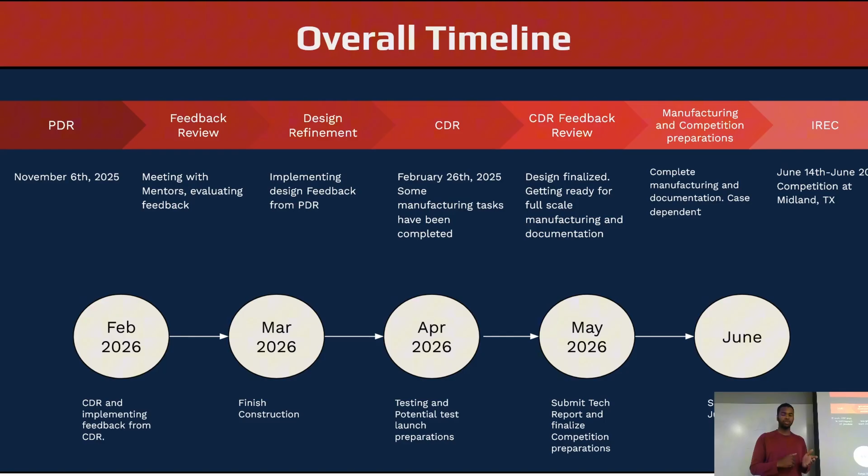So, changes from PDR and the current state of Juno. All of our airframe parts have been ordered and received, and our motor and its associated hardware have been ordered. We have begun cutting and squaring the airframes and couplers, and we are still evaluating potential experiments for the SDL payload challenge. We have set an internal team deadline for March 25th.

For our budget, the team has spent around $3,800 so far, and we anticipate needing to spend another $780 on the actual rocket. The remaining spending that we have is around $2,880, and almost all of that is competition costs. That's dominated primarily by the lodging expenses for 7 nights, 3 rooms for 8 people, and the $700 rocket fee.

We currently have $2,428 in the bank, and we anticipate needing another $840. That is our baseline budget. We do have an ideal budget or ideal case, and that includes an additional room that adds around $600 to our overall need, which brings it up to $1,435.

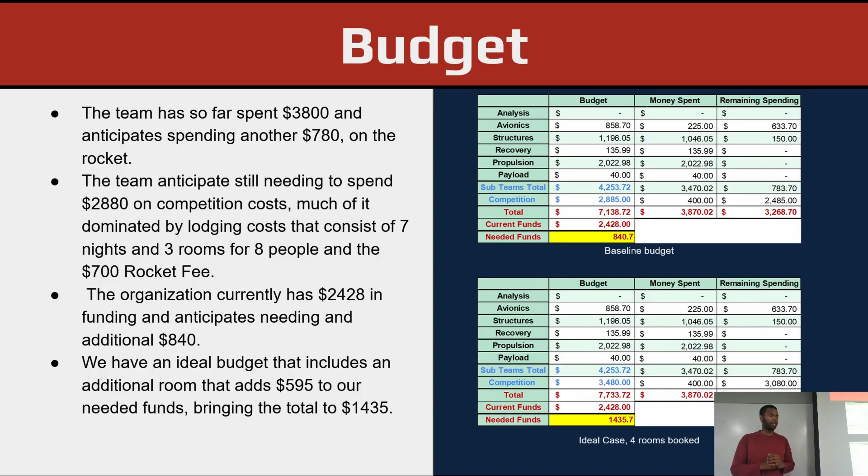Moving on to analysis. Starting with an overall overview of Juno, Juno is a 6-inch diameter rocket with a total length of 117 inches, which is a little under 10 feet. It has a dry mass of 39.2 pounds and a wet mass of 69.3 pounds, and that's including the motor and all associated hardware.

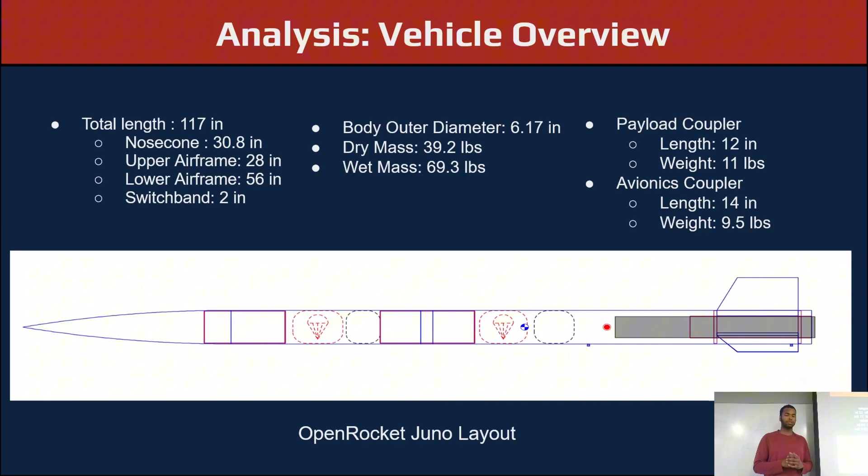We have 2 main internal coupler sections that carry a lot of the important items. The payload coupler, which is 12 inches long, contains the CubeSat for our payload experiment, and it weighs 11 pounds. The avionics coupler, which contains all our flight computers and associated hardware, is 14 inches long and weighs around 9.5 pounds. The 2 couplers are where we've decided to add our variable ballast to tune our stability and tune our apogee.

For a breakdown of the overall competition scores, there is a total of 1,000 possible points, along with an extra 50 bonus points for adopting the CubeSat form factor for the payload experiment. Of those 1,000 points, 60 are awarded for the timely submission of competition documents. 440 points are split between the technical report and the design and build quality, and the remaining 500 points are focused on flight performance.

Breaking down that 500 for the flight performance a little further, 150 of those points are awarded on a binary basis for recovering the vehicle. If the vehicle is successfully recovered with no damage or is reflyable, the team is awarded 150 points. If that is not the case, we receive a 0 for that 150 points.

The remaining 350 points are for apogee accuracy, and that requires a bit more analysis in its approach. As the formula shows in the top left corner, we lose around 0.1 points for every foot in apogee we deviate from our 10,000 foot target, and a 3,000 foot deviation will result in 0 points being awarded for that specific item.

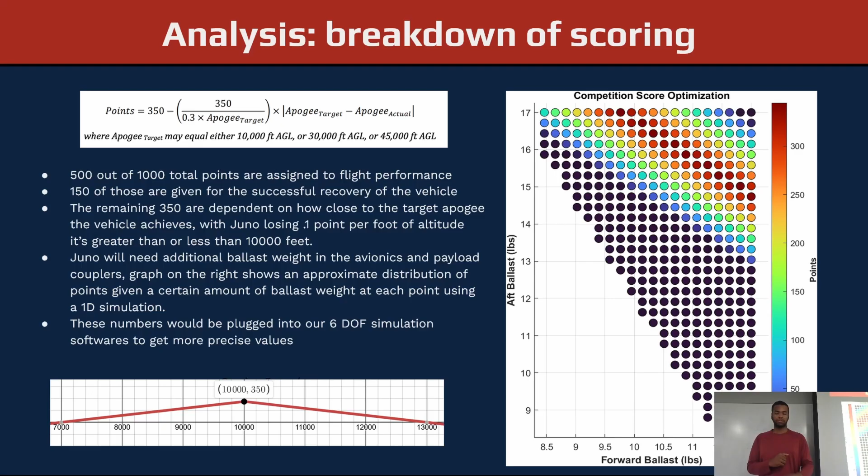Across all three softwares, we've kept our simulations with consistent baseline assumptions: a 6 degree launch angle, the same site elevation of 890 meters, and zero wind. This intentionally includes a roughly 2,000 foot buffer in our targeting to leave margin for real world effects on our potential apogee loss.

Our stability across all three softwares is around 2 calibers. Once we get closer to the launch, we will update these simulations with more up-to-date masses and weather expectations. That will help us further refine our simulations. Moving on to propulsion.

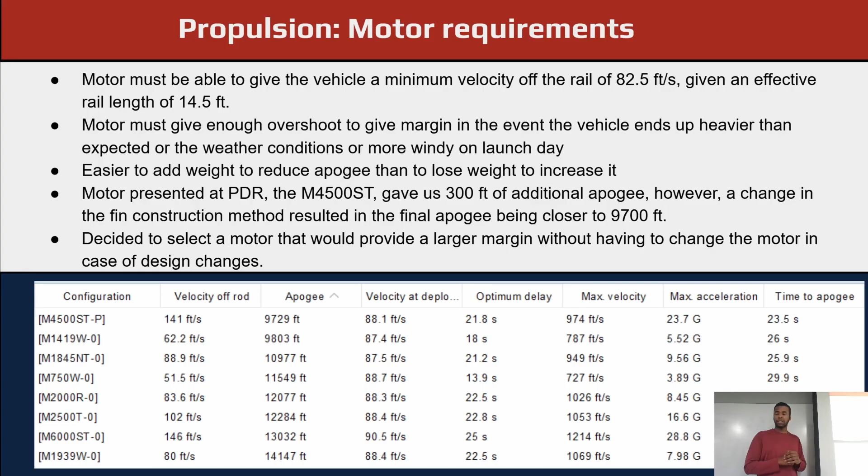So presented below, we have a table of around 8 motors within the M impulse class that fit our needs, and we have around 3 of them that meet our minimum off-the-rail velocity. The M4500 is the one we presented at PDR, as I previously mentioned. The other 2 are the M6000 and the M2500.

So we ended up going with the M2500 as it met our minimum off-the-rail velocity, and it gave us around 2,000 feet in overshoot on our apogee, and that would allow us to accommodate variability in the wind on launch day, as well as general design choices.

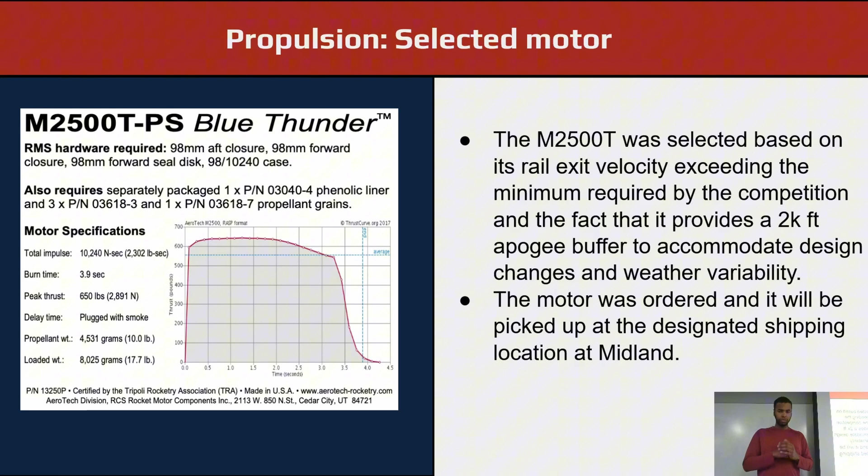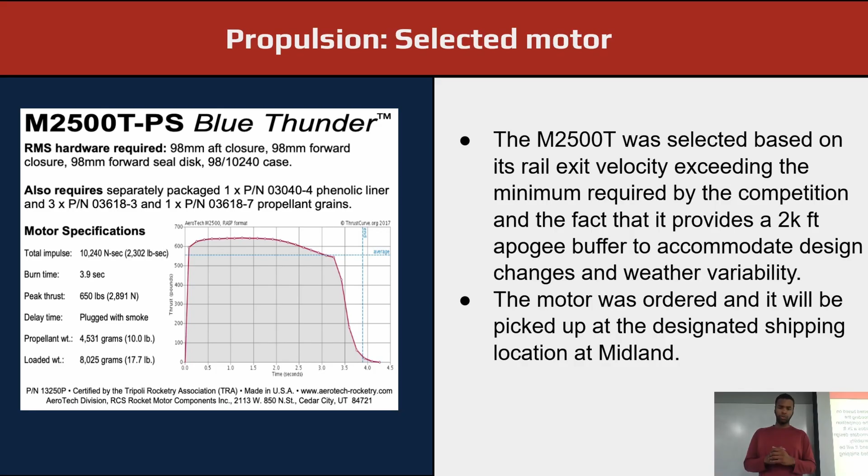For the M6000, the reason we decided against that one and chose the M2500: while they both met our minimum off-the-rail velocity, the M6000 gave us a lot more overshoot. It overshot by around 3,000 feet, so that would require a lot more mass added to the vehicle to get it down to 10,000 feet. So, yeah, the motor was ordered and it will be picked up at the designated shipping location at Midland at the competition. And we'll pass it off to structures.

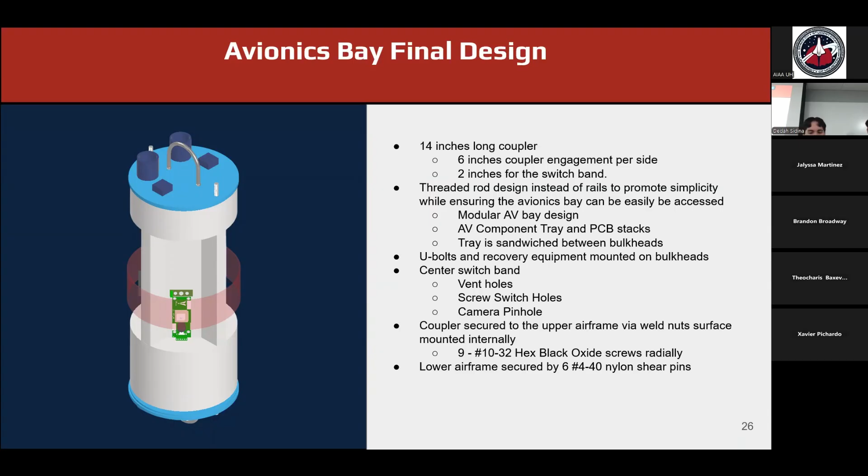Weld nuts along the coupler, and then we will have 9 10-32 hex bolt black oxide screws radially to secure the coupler to the upper airframe. Okay. Here you can see the arrangement of the components that I have on the CAD. Some things may change slightly as avionics make further decisions on how they're going to do wiring and things like that. But a lot of this is adjustable, as we can change where the holes are going to be, so we can do the threaded inserts and maneuver parts around.

But as you can see, we have our screw switches, we have our batteries. Then black on the left is the camera, the RunCam Thumb Cam 2, which will have a pinhole camera as well. Then you have the TeleMetrum and the EasyMini as well.

As far as the payload, we're still going for the CubeSat design. We have a 3D printed frame as well as a 3D printed sleeve, so it'll all go together. As far as the ballast weight, we are going for a ballast right now because we haven't had an experimental payload designed yet. The ballast will be pretty much squares with varied infill, so we can reach the desired weight that we want. If we need to add weight, we can add it for ballast without affecting the stability too much. So it's pretty simple. Again with the U-bolt and the threaded rod design.

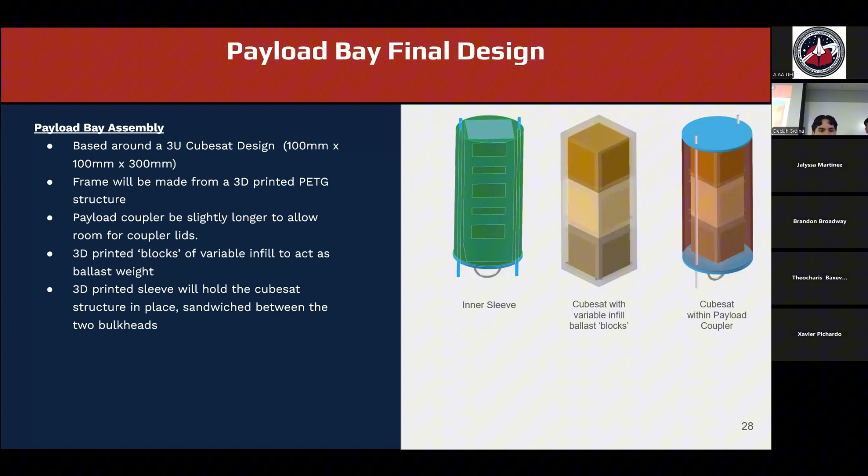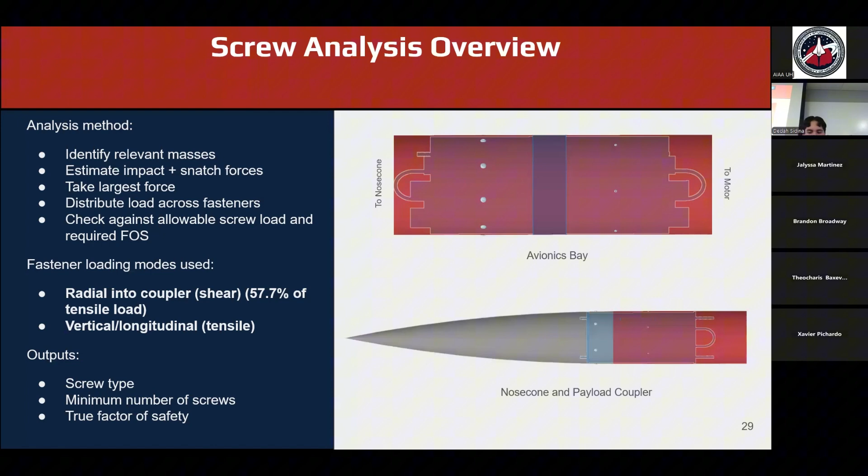As far as the screw analysis, you can see the avionics one right there. Total, it's going to be around 18 pounds. You see the largest force of impact. And we're aiming for a minimum factor of safety of 2. And with nine screws, we exceed it and get a true factor of safety of 2.2.

As far as the payload, it's a little bit less force, around 3,000 pounds of force. And it is also lighter, around 12 pounds. And with 6 screws, we achieve a true factor of safety of 2.21.

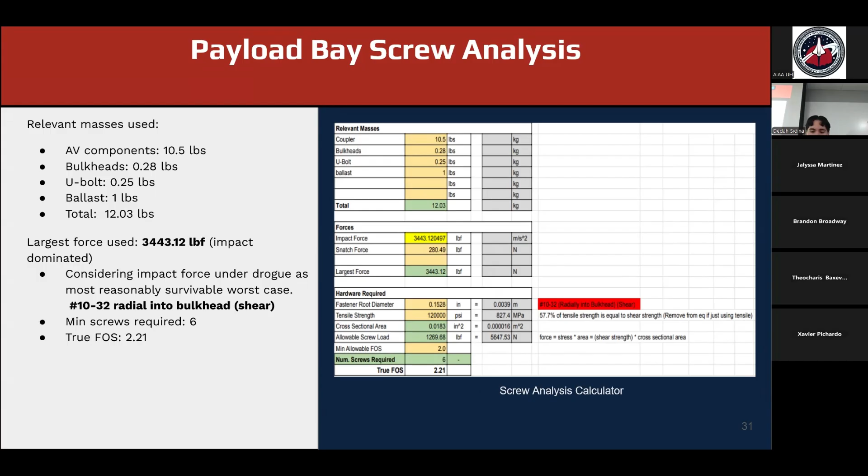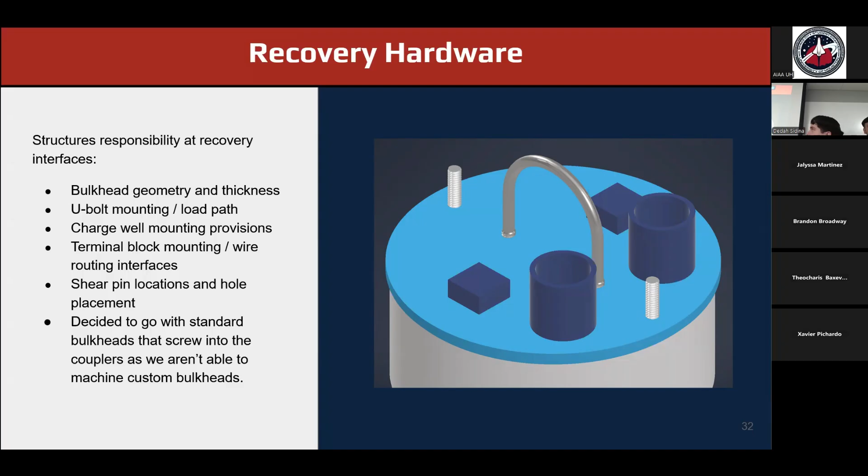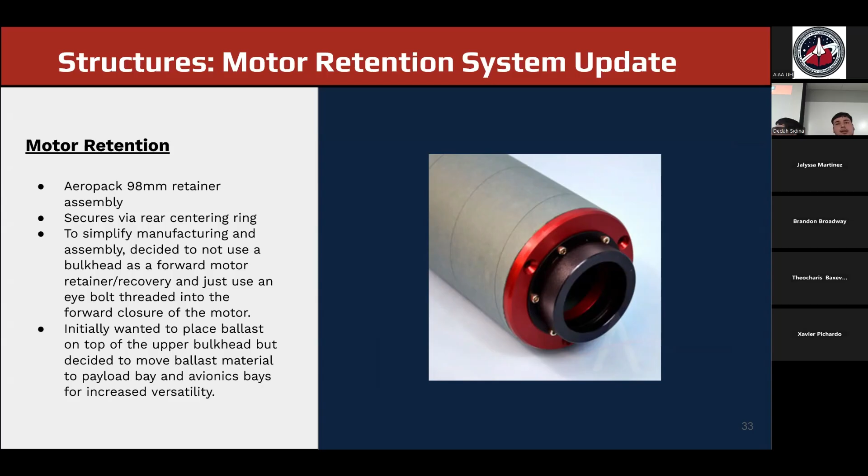In terms of our motor retention system, we'll be using a 98 millimeter AeroPack retainer. We'll secure this through the rear centering ring, to simplify our manufacturing and for ease. We decided not to go with the front motor retainer bulkhead and just use an eye bolt threaded into the front closure of the motor. We wanted to place ballast on top of this front bulkhead just because it's a somewhat convenient position, but we decided to move the ballast into the avionics and payload for greater versatility.

Our fins are going to be 3/16 inch thick with 5 plies of carbon fiber on each side, 10 plies in total. We will be going for a semi-quasi-isotropic layup with 0 degrees, positive 45 degrees, 90 degrees, minus 45 degrees, and 0 degrees to balance out the load properties and to prevent the prevalence of weak planes.

We'll be assembling this externally and then bond it to the motor mount tube. To sandwich the fins and make them more secure, we will be putting them between the forward and rear centering ring, and we will be doing this structural bonding with Proline 4500. Our core material for the fins, as we mentioned, is 3/16 inch G10 fiberglass.

Some of the laminating materials we have considered are intermediate modulus 6K carbon fiber from Composite Envisions, but we were only able to use it for our first coupon set, as we have unfortunately run out. In light of this, we are considering a new carbon fiber of similar modulus from Solid Composite that weighs roughly 11 ounces per square yard. And for comparison's sake, we also did some layups with 6-ounce fiberglass. For our epoxy system, we'll be using System 2000 from Fibre Glast with the 2120 hardener.

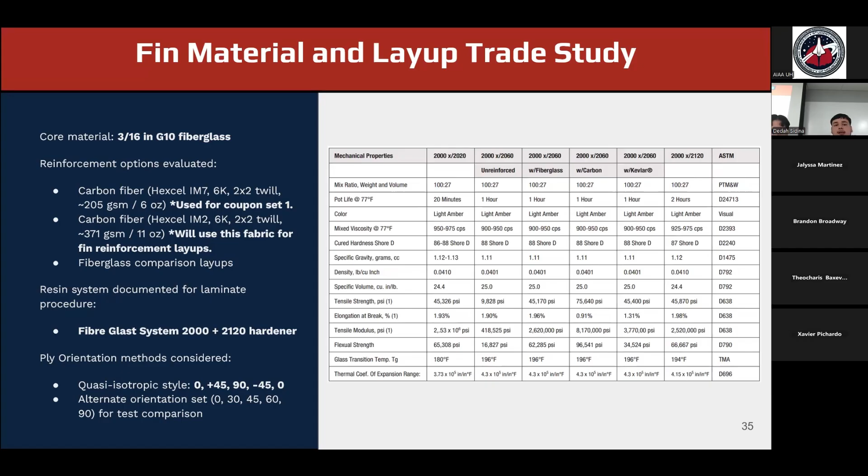And in terms of our layup procedure, we'll be taping and labeling the cloth in the order we're going to lay down the plies. Then we will sand the core and see how good the surface tension is for receiving epoxy through a water bead test. Once we see it's acceptable, we'll clean it off with acetone and isopropyl alcohol, then do our layups, apply our peel ply, breather and vacuum bag it, and for ideal curing of our long cure epoxy, we will keep it in a stable temperature.

Yeah. Doesn't even let me. Is it on here? You want to mess with it? We will see. Oh, let's go. How many engineers does it take?

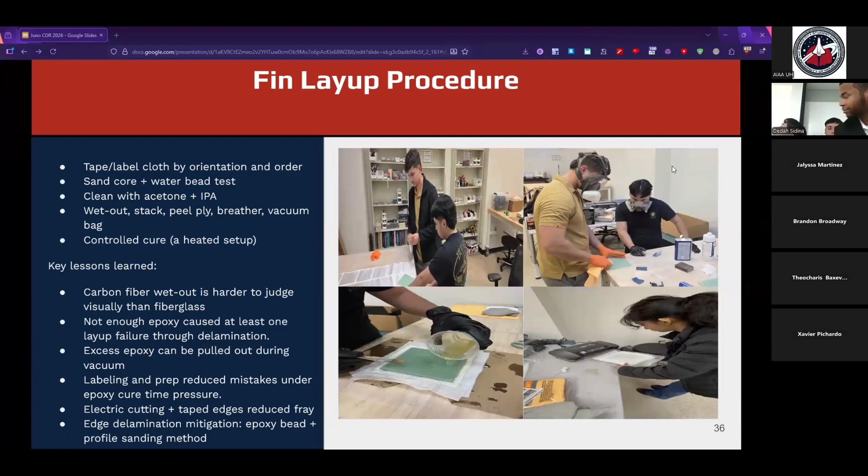Okay. While laminating the testing coupons, we have learned a few lessons. With carbon fiber it is visually harder to tell when it's fully laminated because it does not have the same transparency as fiberglass. In one of our coupon sets, there was a partial delamination failure when we tried cutting it out. So we definitely need to make sure our epoxy is applied evenly and there's no voids or bubbles.

Labeling and keeping them sorted definitely saved a lot of time in coupon manufacturing. We did it in only a few hours. And as we said, our taping and using electric shears also saved time and effort. Okay.

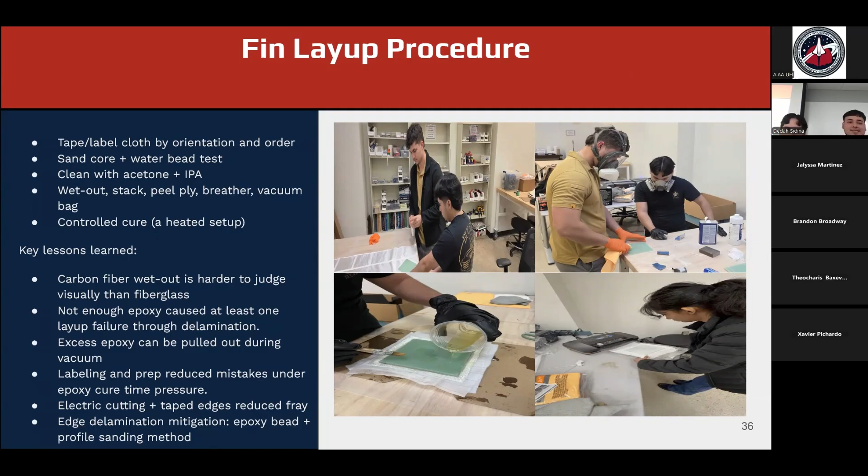I think you skipped 2 slides.

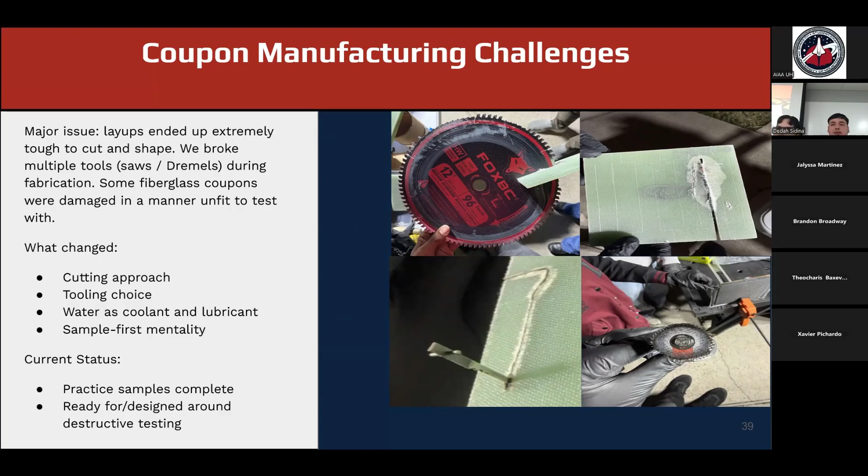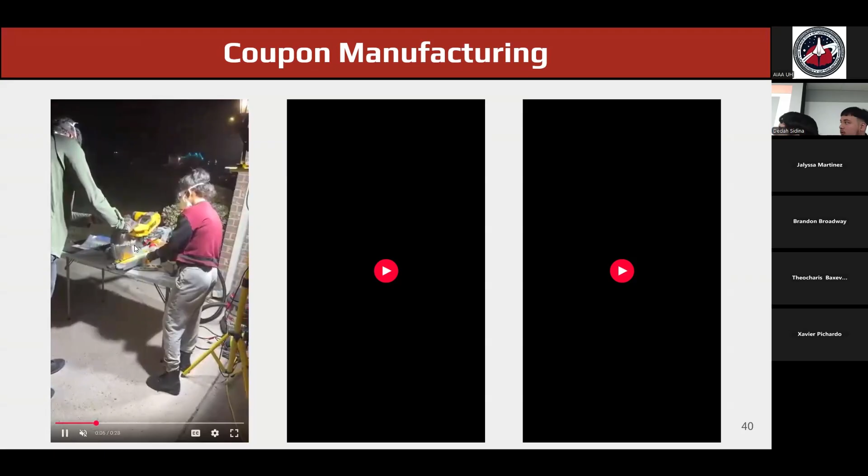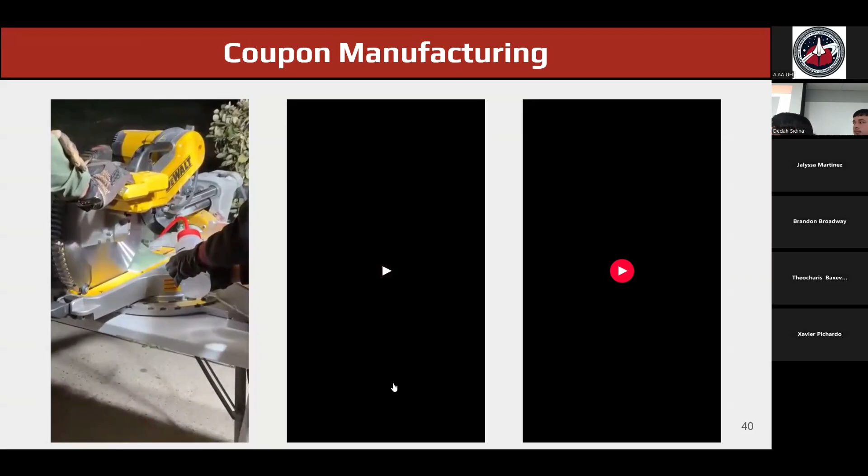Well, there's them cutting some of the coupons. This one over here. That's cleaning the blade, I guess. No, it's actually cutting with the water spray. Oh yeah, cutting with the water spray. And then more cutting. It was a lot of work. There you go.

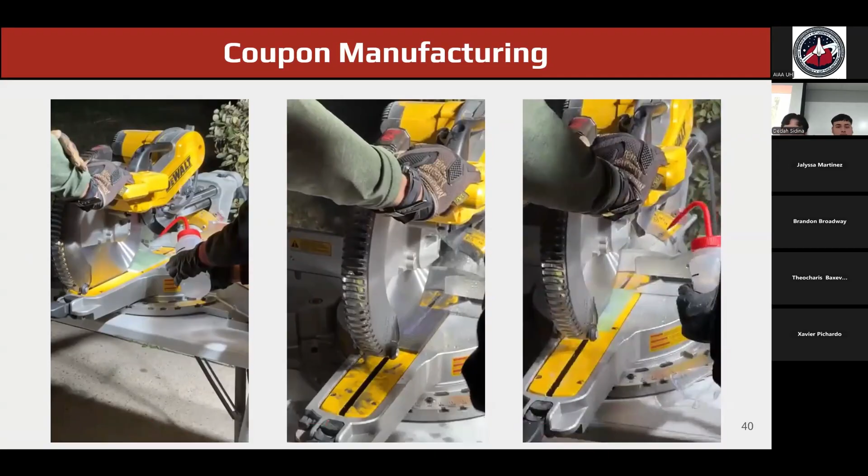As a direct test to determine our shear modulus, we'll be using test coupons made of the same base plate and the same layup style we plan to use for our competition fins. There are 3 additional sets of fiberglass coupons with varying layup styles. Of those 3 sets, one is made as a control to determine the approximate strength advantage of carbon fiber. In this, we will have the same layup orientation as the competition fins. To empirically determine the shear modulus, we'll be using 3-point bend testing.

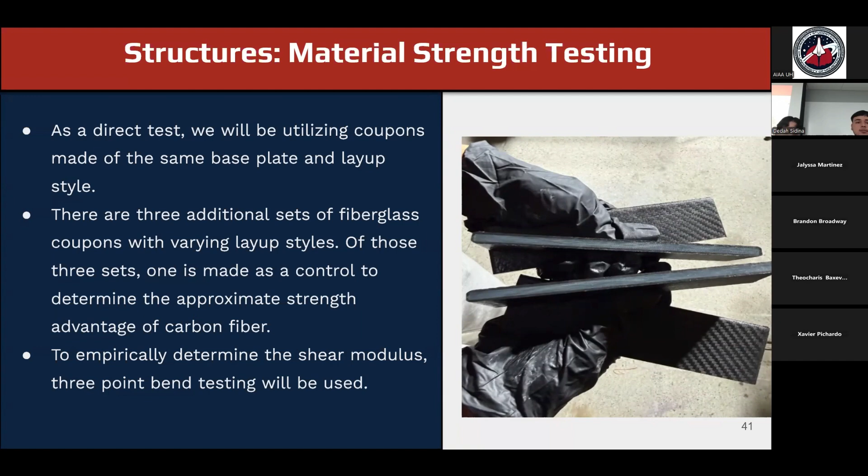Seeking materials testing, we have reached out to Dr. Hamami, who works with materials science and MAE. The main reason we are doing so is so we can support and facilitate our testing, validate our hand calculations, and find a good setup to complete the test. It's important to include this for our technical feedback and actually see that our assumptions and calculations translate to the real world.

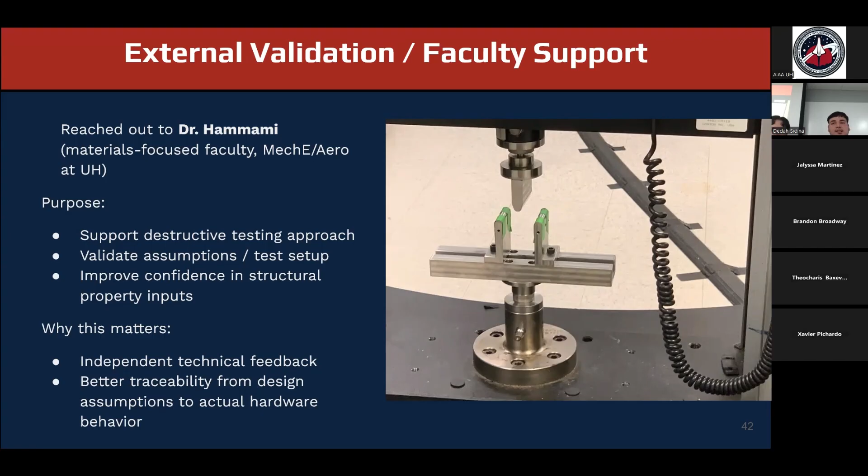So far, we have cut down our airframes from the original manufacturer size of 60 inches and 30 inches to 56 inches and 28 inches in length. The ends are squared, and we are preparing to extend the fin slots so we can slide the whole fin assembly in when it is complete, and prepare the centering rings for bonding.

The biggest thing when it comes to squaring airframes is that when you put on the coupler and push the airframes together, you will have little or no gap. And it's just better for general build quality, especially when you're putting sections together and trying to line up screws and things like that.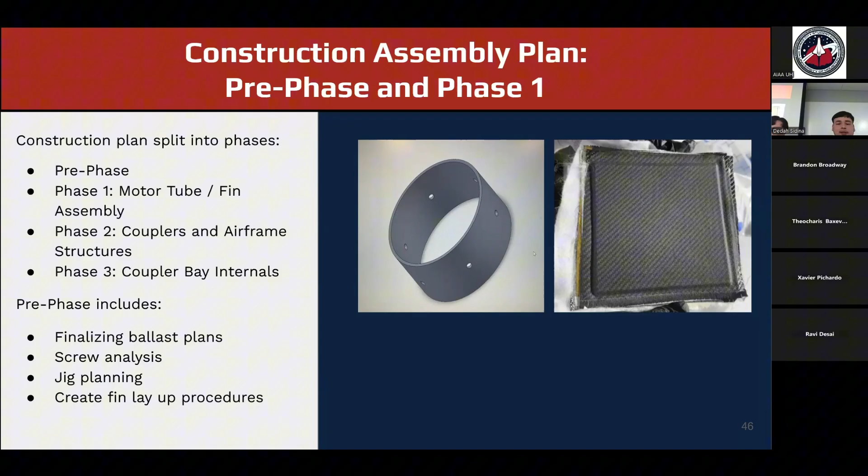For pre-phase and phase 1, our test coupons are created for strength testing, cutting down our airframes and squaring them, extending the fin slits, and preparing the motor mount tube for root bonding and subsequent bonding to the aero pack. Cutting out our fin profiles from the core plate and then doing our layups on them and cutting them down to their final shape if needed, mounting the fins to the motor mount tube and to its eventual place in the lower airframe.

For our final phase, phase 3, map out our radial holes from our center line jigs and drill our coupler mounting holes, shear pin holes, vent screw and camera pin holes, mounting our internal weld nuts to secure our couplers, drill our holes, mount rail buttons along the airframe. Lastly, prepare our airframe for painting and subsequent finishing.

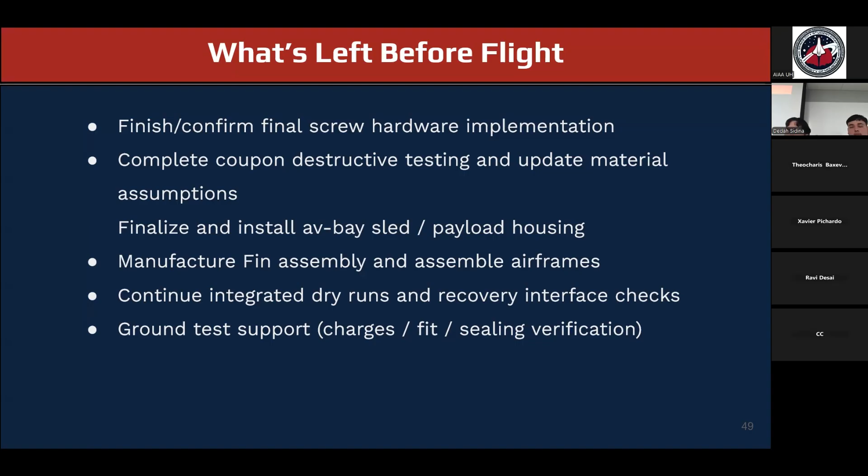Finalizing the install of the payload sled, payload housing, getting those 3D printed, and making sure we can do those final changes that we need. Manufacturing fin assembly and assemble airframes around that. Continue integrated dry runs, recovery interface checks, and then ground testing supports before we can actually assemble everything and get ready for flight. And moving on to avionics.

Thank you. So hello, my name is Jake Rodriguez. Sorry. Yeah, you good. Have you good? Oh, Nathan.

My name is Tan. I'm junior electrical engineering. Yeah. I am a sophomore computer engineer. I'm a junior. And we are the avionics sub team.

So just to give you a quick overview of what we do and what we are in charge of for the system is that we electronically detonate the charge and collect telemetry data from our 3 flight computers. The first one we use is referred to as COTS, commercial off the shelf. Those are our primary and secondary flight computers. Those are the ones who actually deploy the charges. We track them using 70 centimeters. I'll go more into that later. And then we receive the data from the ground.

And then our secondary system is our SRAD system, which is the student research and design system. For student research and design, we develop our own software and the PCB boards. For that system, all it does is just collect telemetry data. We also develop a ground station so we can see that live telemetry as it's crucial information to recover the rocket. And if anything goes wrong, we have that data so we can analyze if we need to.

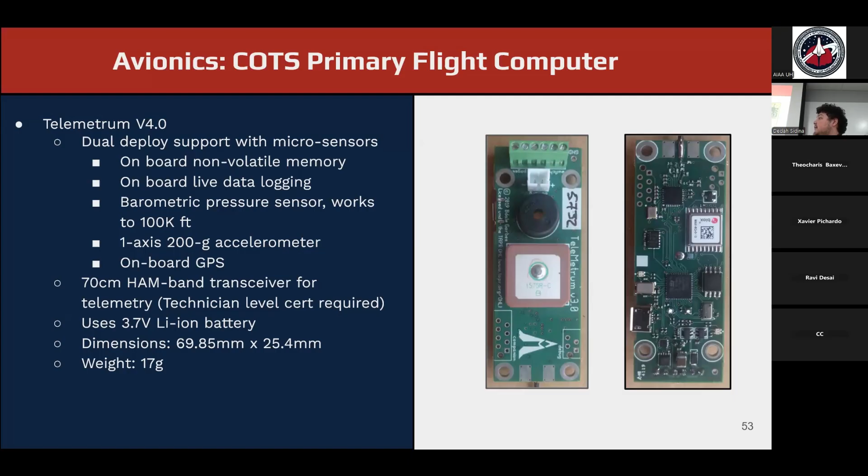It has a one-axis 200G accelerometer and an onboard GPS. It does use the 70 centimeter ham band, which is a requirement of our competition, and it is a technician level requirement for our ham license. It uses a 3.7V Li-ion battery, and the dimensions and weights are there.

Our secondary flight computer is an Easy Mini. It also has the same dual deployment capabilities and has non-volatile memory and live data logging, and has a barometric pressure sensor up to 100,000 feet, but it doesn't transmit data. It just saves it internally as a backup system. It also uses a 3.7V Li-ion, and this is just our backup system so if for whatever reason our main flight computer doesn't work, it will blow a second set of recovery charges to make sure that our parachutes will deploy.

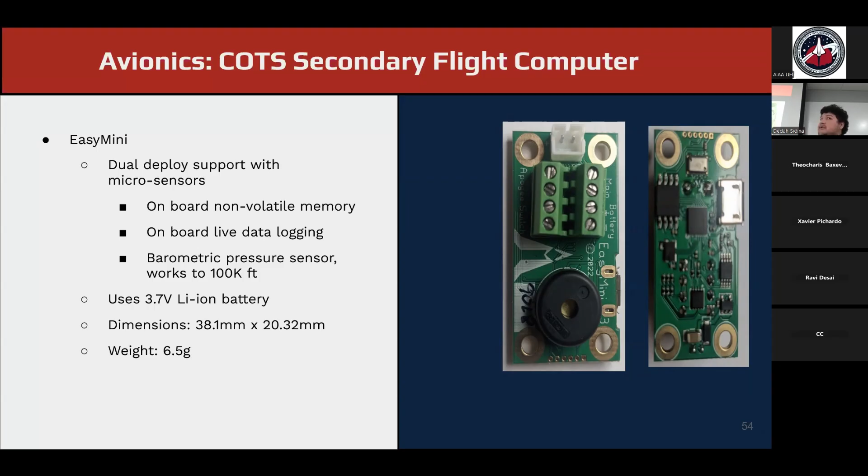Kind of go into the reasons of why we chose these flight computers. The TeleMetrum, like I mentioned, meets the 70 centimeter band requirement for the COTS GPS. That's a new rule. They found a lot of interference with the 33 centimeter, so we are required to switch to a 70 centimeter. We've already had experience with this flight computer before, so we chose to keep with it, and it has shown good results so far. And also just combining the altimeter and GPS in one unit is a great thing for ease of integration.

Easy Mini is just because it's a basic and simple barometric flight computer that fits our needs as a fully redundant flight computer. I will mention testing on this one later, but Easy Mini is a staple for beginning rocketry, and a lot of people use it. So it's very trustworthy and has been proven to work very well. And it uses the same software interface as our primary flight computer. Both use AltOS as the ground station and setup.

So going to the tertiary system, which is our SRAD flight computer. It uses a dual core microcontroller. It has all sensors running on I2C or SPI. We developed a new PCB from the ground up, just because we lost a lot of the PCBs from the year before, and we wanted to switch over to a different microcontroller. So we designed our own PCB from the ground up.

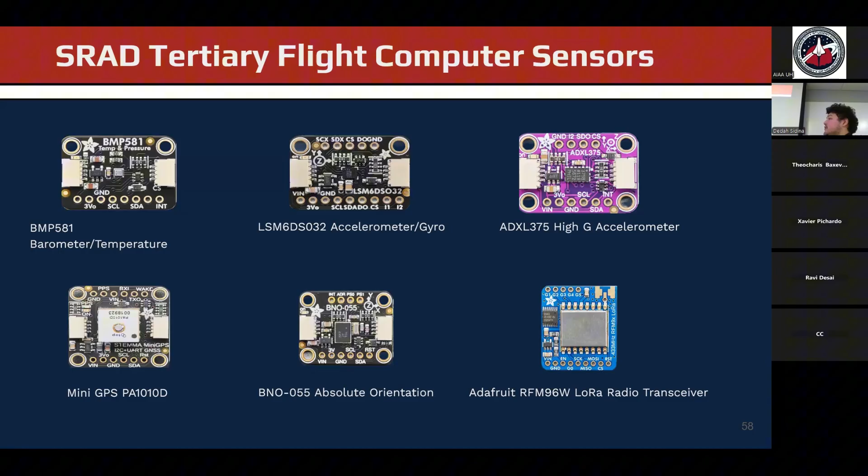A BNO, our absolute orientation sensor, has 9 degrees of freedom. We can talk about that one later. But it just tells us what the orientation of the flight computer and the rocket is going to be. And then this is our LoRa module, the one that transmits 70 centimeters out to the ground.

So the hardware deliverables from PDR are we were going to improve the PCB to include power delivery, SD card, and an RTC, battery drain test system, and then work towards a final prototype to get ready for a test launch. And what we have done so far is that we have finished a second prototype that adds SD card, power delivery, and RTC into it. The asterisk is that we have it and we have the plans for it, but we ran into some software issues that we're trying to make sure we can fix. But the board is aligned, and I'm talking to my software developer to make sure everything's finalized. The board isn't ordered yet, but we have the plans there.

Upgraded the system to 5 volts, like I mentioned. This goes back to the SD card and power delivery issue that we ran into where we needed more power. So we went to a 2S Li-ion battery that bucked down to 5 volts. We finished basic battery testing for the COTS flight computer, and we are on track to finishing the prototype by test launch.

Future tests: refining the SRAD flight computer for the final design, verify the telemetry setup, make sure everything works within the AV bay that we have, we can receive data and everything's great, and test flight the SRAD flight computer during the test launch in April. And so now we'll go into software.

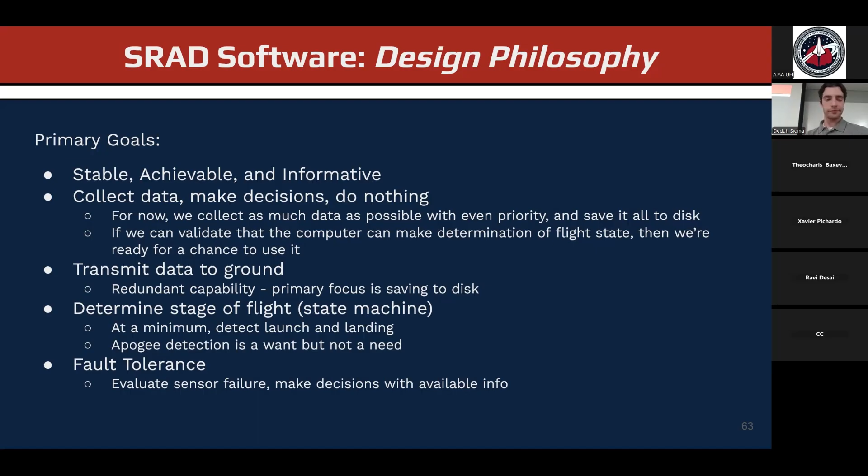So aside number one, why FreeRTOS? Why not just the plain ESP-IDF, or if you're familiar with Arduino boards, their own development environment that's convenient and easy to use? Well, first, what is an RTOS? An RTOS is a real-time operating system, designed for time-constrained tasks with hard deadlines. A hard deadline means that if you miss it, something fails completely.

There's no recovery. Windows or Mac OS is a general purpose operating system, and every time you run a program, there's no deterministic guarantee of how long it'll take. But those kinds of systems don't work in things like cars or rockets, because you press the brake pedal and the car has to stop in the same amount of time every time. So using an RTOS allows us to make deterministic claims and goals about what our software does.

So why FreeRTOS instead of commercial options? Well, FreeRTOS is free. It's open source. We can put it anywhere, use it in anything. And it's very lightweight. It is just a scheduler. It just allows us to make those deterministic guarantees. And it doesn't make any assumptions about the hardware. So we take care of that with the vendor package versus baking that into the RTOS.

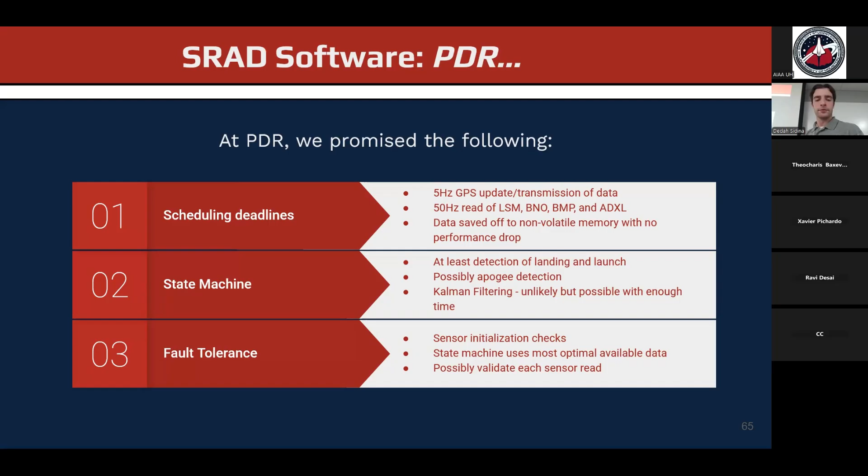So fast forward to now, we have hit this 5 hertz scheduling deadline. We have hit this 50 hertz scheduling deadline. The data is saved off to non-volatile memory with no performance drop. As far as the state machine goes, we can detect landing and launch. We can detect apogee, at least with software and kind of tests, but hopefully we will be able to demonstrate that with a true test flight.

We've also gotten deeper into sensor calibration, which turned out to be a bigger rabbit hole than we imagined it would be at PDR. And it's unlikely that we would have time to implement something like a Kalman filter before test launch, right? As far as fault tolerance goes, we are doing the sensor initialization checks. The state machine will use the most optimal available data. We're probably not going to validate every sensor read.

The likelihood of a custom PCB failing on launch, if it hadn't failed earlier, is extremely low. It was a high data overhead for us, and we didn't really have the transmission bandwidth. So at that point, if something breaks on the PCB while the rocket is in the air, we've already had bigger mechanical and structural problems.

So aside number 2 is the software scheduling. Aside from testing the code, how do we know that the system actually works, right? So aside from identifying which things take the longest, the 5 hertz transmission actually revolves around the 5 hertz GPS update. There's actually math here that shows us this will work, right? So the kind of schedule that we've picked is rate monotonic scheduling. Every task will run at some period and then take some amount of time.

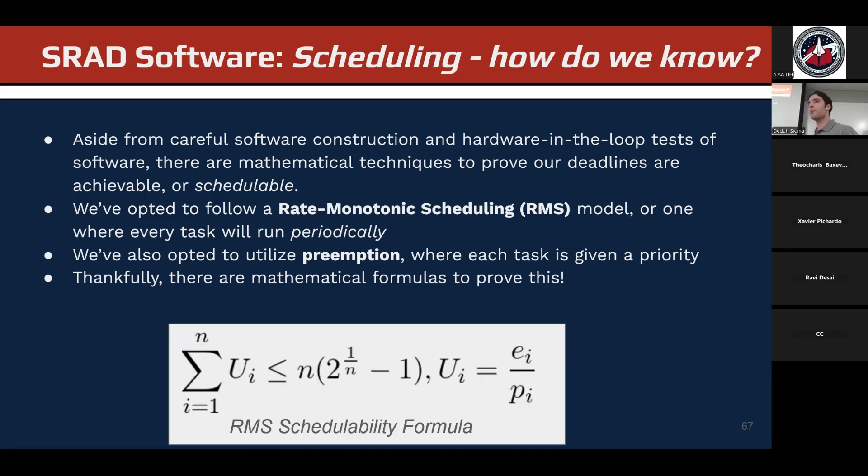You can tweak some rules and break some rules. It's just a math model. It doesn't really account for hardware as much, and you can actually kind of break that rule and go higher. But if you're under this bound, your system is schedulable. So here's what the test shows. We use the hardware CPU timers to benchmark operations in microseconds where possible, and milliseconds where not possible.

And we've got our tasks split up between cores, right? So FreeRTOS was a software optimization. Dual core also allows us some kind of asynchronous optimization. And at the end of this, when you sum this all up, the first core is only 16% utilized. Only 16% of the available processor time is utilized. The second core is only 7% utilized, right?

So we've got the software as lean and mean as possible in the computer and structured in such a way that there's tons of leftover processing power for more projects, or saying, well, we said 50 hertz, maybe we could pull off 100 hertz, right?

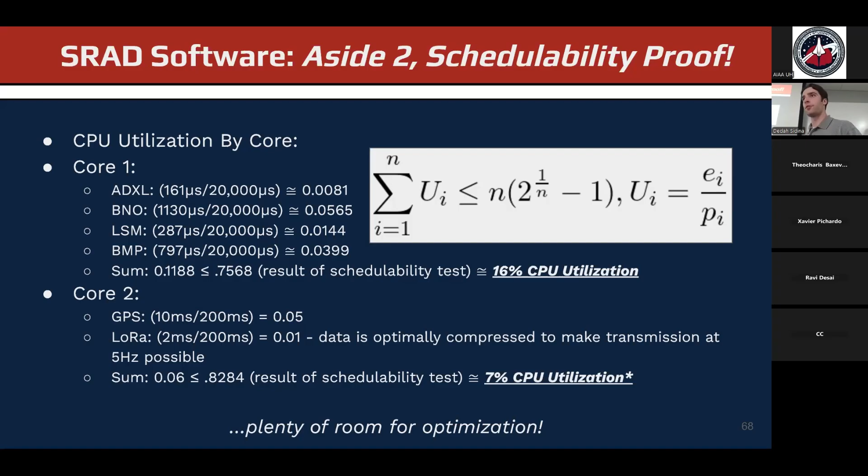So now we're moving into state machine and calibration. Basically, the sensors have to be reasonably well calibrated to make the state machine mean anything. If there's no expectation that the sensor data is correct at all, then the state machine is useless. So we really prioritized IMU calibration and altimeter calibration here.

So for IMUs, we want to calibrate the static bias noise when we power on the computer using an online algorithm. Basically, an online algorithm, like imagine you're taking the average of 20 numbers, and now you want to take the average of 21 numbers. Do you want to have to add them all up again and then divide by 21 instead of 20? Not really, right? And then you have to save all your old numbers. So an online algorithm updates that in place sequentially. All you need is your previous state and your next measurement.

This allows us to tweak and tune our calibration length and duration. We've selected Welford's online algorithm for this because it calculates running average and variance simultaneously, right? So let's say we power on the computer, then we move the rocket around on the stand. The variance will balloon pretty quickly. The calibration procedure will recognize that and just restart, because after we're done screwing with it, it's going to sit on the launch pad for probably a couple hours. That's beautiful calibration data time.

As far as the altimeter goes, for some time after startup, we're also going to use Welford's algorithm to average current altitude. We're going to save that value off as static bias and subtract it from future readings. The altimeter attempts to read in feet above sea level, but we don't really care about sea level. We care about how high off our ground we went, so we zero that out on launch.

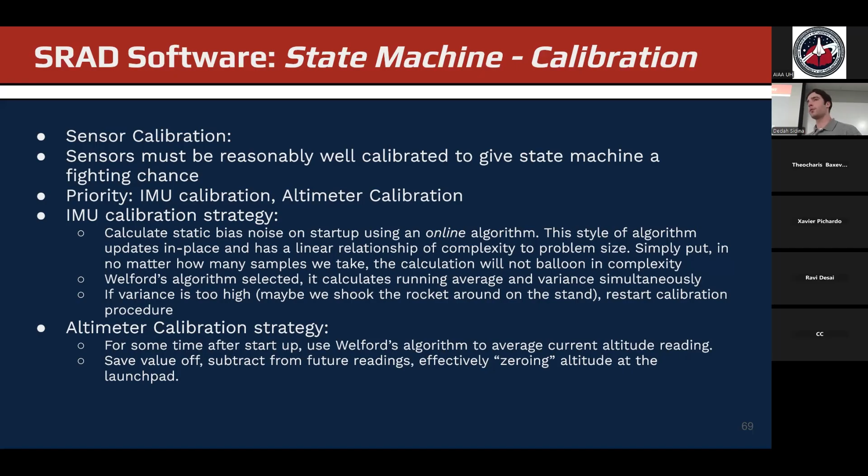So the state machine that we promised can detect launch. The algorithm somewhat follows this. We check for an acceleration above a tunable threshold for some amount of time. It's a pretty coarse threshold. Obviously, we go from almost zero acceleration to about 16 Gs in half a second or less. It's pretty hard to miss that one. So how high that threshold is and how many readings we need are tunable parameters.

Landing detection works similarly. We check for consistent, very low altitude. That one's also pretty hard to miss, right? So again, how low your altitude is and how long that has to be true is also a tunable parameter updated in place.

And then apogee detection: if change in altitude is negative enough, and how negative is a tunable parameter, between some number of readings, then we've detected apogee. This one's a little trickier. It's more nuanced to detect. So this is the all eyes on apogee detection for the test flight. The number of measurements and the descent comparator, how big that interval is, are the tunable parameters of that algorithm that we'll need to test.

And then fault tolerance. Like I mentioned earlier, we don't have two of every sensor, but we have two ways to get every source of information that's spread across the sensors. We can compare sensors. That's useful for future designs. What did we like? What didn't we like? How hard was it to get this one to work?

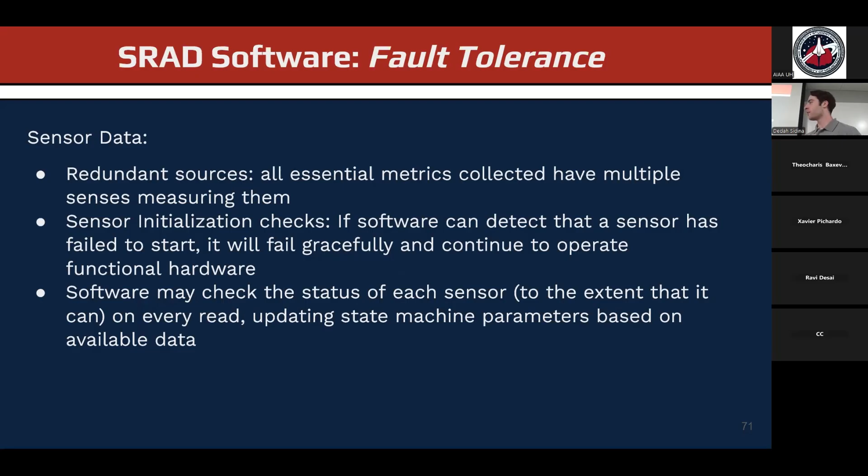And then open work following CDR. The goal of this list is things that, let's say our dreams come true and we get all this done, anything that needs to be tied up is validated and done right at test launch.

Some other open things that could not hurt the design we already have are sensor fusion algorithms. If we have two sources of information, you can denoise them or calibrate them, but you can also denoise them against each other. That would streamline our sources of information and make our data more accurate. If we can compress more data, we can send more data. Right now, we're sending at 5 hertz with some assumptions about what the least significant bit is on our data.

If we could send more, we would, right? So because of the antenna hardware that we've chosen, we have a really reliable and strong and wide signal. But that comes at the cost of not being able to transmit as much. So if we can make our data smaller, we can transmit more.

Flash memory file system instead of using an SD card. The SD card modules have proved finicky and it's slow and also can damage the SD card with writing at the amount that we're writing. I mean, we probably write like 16 kilobits of data every half second or so for the entire time the computer is on. And so aggressive writes to the SD card can wear it down quickly.

If we somehow had time, we could look at advanced state estimation techniques or dynamic models of flight. And then scheduling optimization, right? So like I said, the CPU is extremely underutilized, not in a bad way, in a good way. We have a lot of overhead room here that we could use to make everything that we have now just run faster if we wanted to.

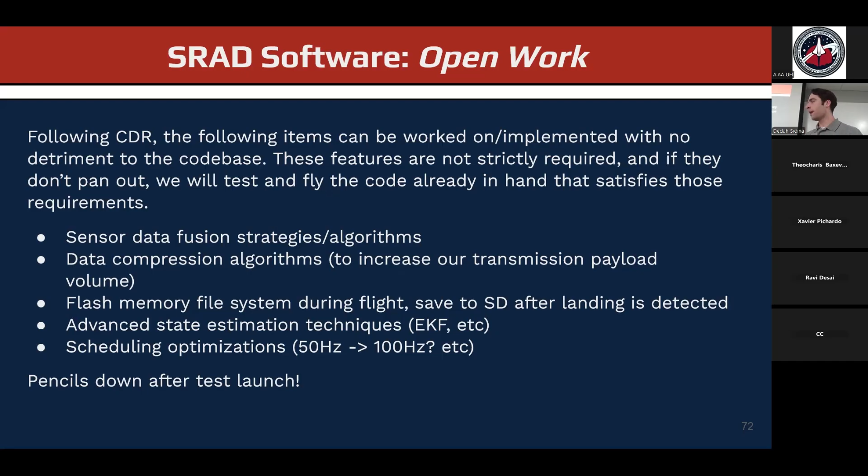And then after test launch, it's really pencils down for sure unless there's a bug that needs to be addressed, right? But at that point, it's too close to contest to bite off anything on this list. Now move on to the ground station.

Hi everyone, my name is Tan, and I'm currently responsible for the ground stations this semester. The ground stations is a combination of two main systems, the COTS ground station and the SRAD ground station, acting as two-fault tolerance, so we ensure that we get the data from the rockets reliably, but also experiment with our SRAD system. A little bit about the COTS ground station system.

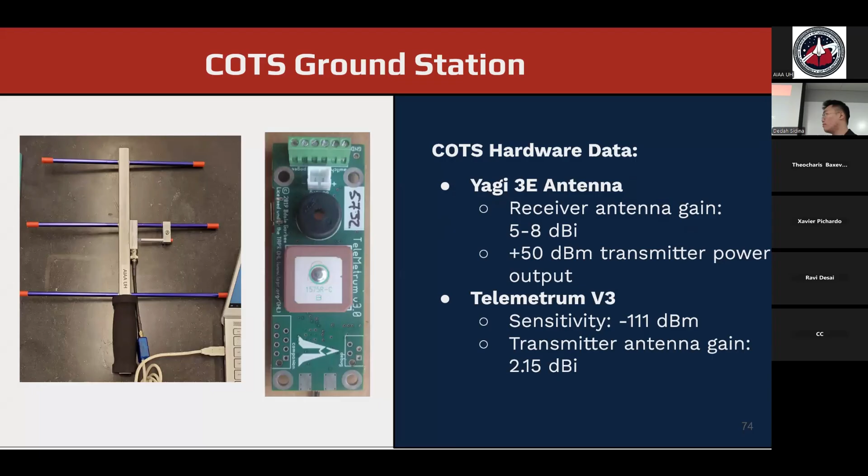A little bit more about the data of this hardware. The Yagi antenna has an antenna gain of 5 to 8 dBi with 100 watts of power output, which is around 50 dBm. The TeleMetrum V3 has a sensitivity of negative 111 dBm with an antenna gain of 2.15 dBi. These data will be vital for our range calculations later on, which I will show you next.

So how do we validate our data? The formula that we are using to validate this range data is called link margin. It uses the power received from the antenna minus the sensitivity of the TeleMetrum to get the link margin. And we can convert the link margin into a distance with the formula, which I didn't include, should have included, and theoretically in free space range for this COTS system, we are getting around 931.24 miles with a miscellaneous loss of 20 decibels and some loss for the connector around 0.1 decibel.

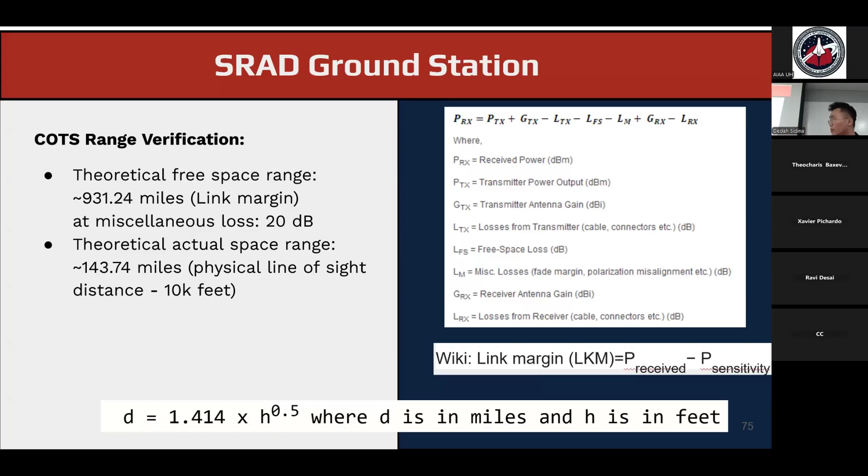For the actual range, which means the physical line of sight of the rocket before we lose the data, it is around 143.74 miles at 10,000 feet. And at the bottom is the formula that I'm using to calculate the theoretical actual range.

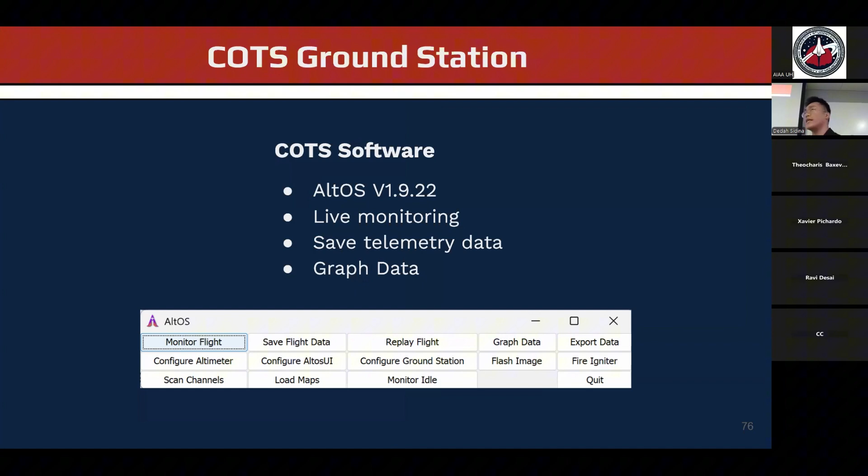Let's get to the COTS software. So we are using the AltOS v1.9.22, which is the latest version right now. And we'll be mainly using it for monitoring live data, saving the flight data, and also replaying it if needed for analysis.

Next is the Student Research and Design Ground Station System. This is our main focus for this semester and the upcoming semester as well. The main microcontroller we'll be using is the Teensy 4.1. We specifically chose this microcontroller because it has SD capability, instead of using the ESP32, for which we would have to implement another SD module, which would cost us more money. For the transceiver, we are using an RFM96W LoRa, using an SPI interface to communicate with the Teensy.

And on the receiver side, we are also using the Yagi antenna, like mentioned previously in the other slides. And for the transceiving side on the rocket, we're using a wire antenna, which I will show the data of later on. The system will also be running around 428 to 431 megahertz or 440 to 445, which depends on IREC rules and also on launch day, where other teams use certain frequencies, and we are trying not to use those same frequencies so we have less interference with them.

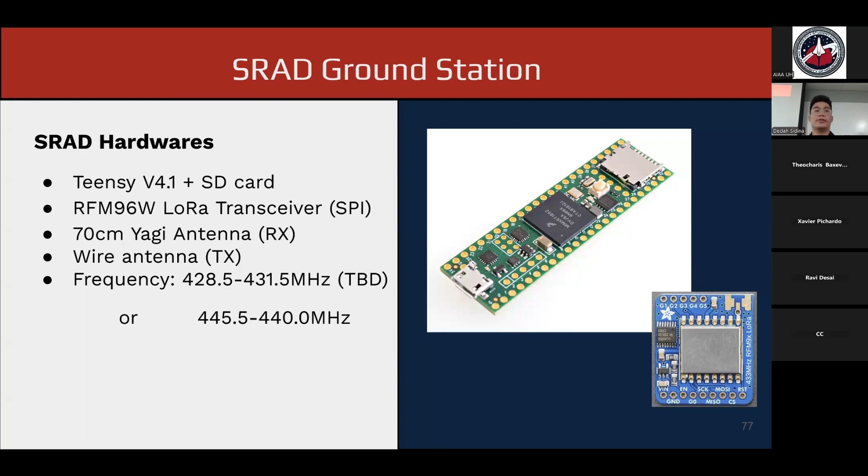These are some data into the hardware. The LoRa, as you can see right there, is embedded with a chip, the SX1276, with a sensitivity of -148 decibel milliwatts, and 20 decibel milliwatts as well for the transmitter power output. The default rate of it is around 19.2 kilobits per second, and we can also adjust that rate all the way up to 300 kilobits per second. Right now, we are using the 19.2 kilobits per second, which is equivalent to 17.1 data packets per second.

Pretty fast. For the antenna on the rocket, we'll be using a 6.5 inch cord, and be able to use that antenna for 433 megahertz. The gain of it is also 2.15 decibel isotropic. Again, the range verification for SRAD: according to the data sheets of the LoRa, it has a coverage capability of 20 kilometers. But we want to get deeper into that.

The free space range, as I mentioned earlier, using the same formula but different data from the sensors, we got around 1240 miles of link margin, also using the same miscellaneous loss at 20 decibels. The theoretical actual space range is around 143.37 miles, almost the same as the COTS system, because this has something to do with the line of sight and the curvature of the Earth overall.

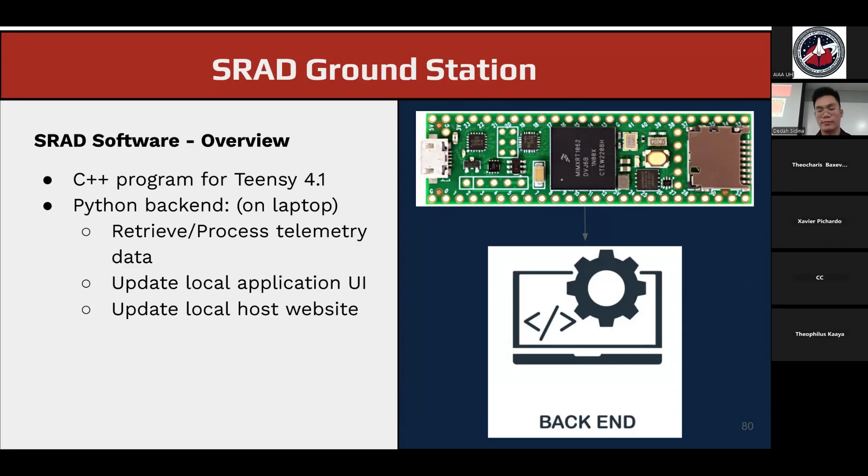Specifically for the app, this is the current user interface of the app right now. It's updating altitude, temperature, and pressures, almost every data that we receive from the rocket. For this version 1, we are seeing the capability of updating live data. We're also seeing the data being graphed live as well. The user will be able to fully manually control it, along with automatically controlling the range if the user wants to. And it will also be able to display the GPS coordinates.

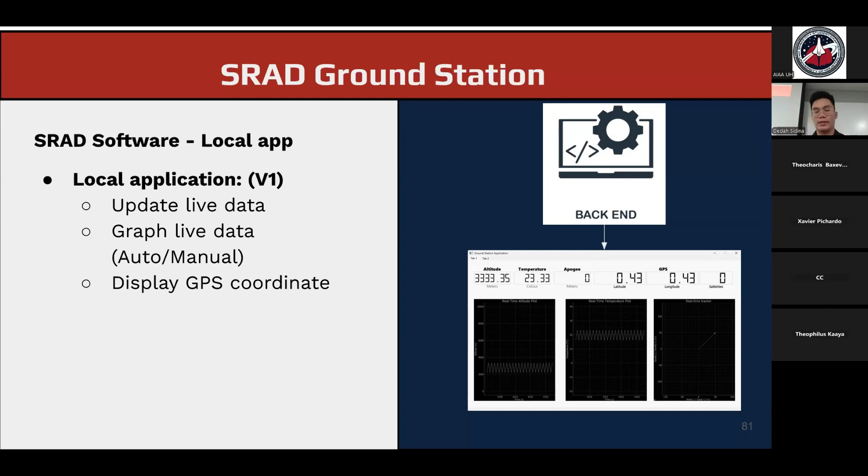In the beginning, we were planning to use a map, but that costs a lot of power consumption and memory usage. So we decided to go with a graphing GPS coordinate system, which simplifies the overall backend. For the locally hosted web, we will be building the website using JavaScript and FastAPI. We are currently researching how to make that website accessible to multiple users. This website also has the same capability as the app. It will update the live data, graph it, and also display the GPS coordinates.

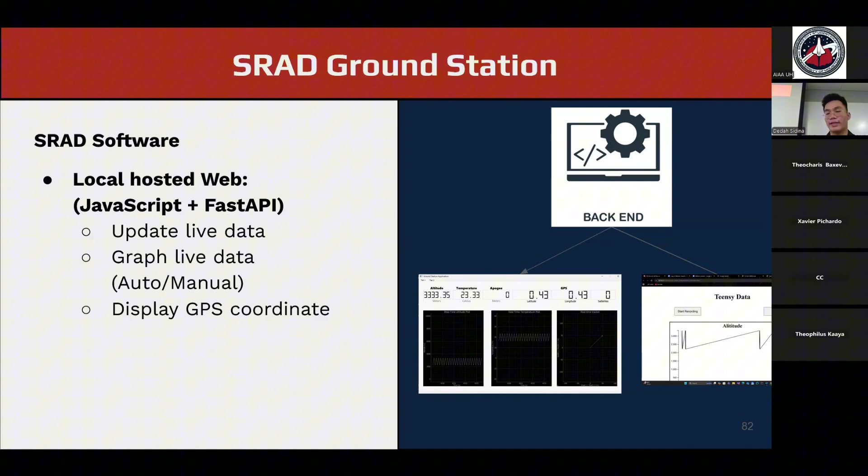This is the full map of the SRAD ground station. The LoRa will receive data and give it to the Teensy, and then the Teensy is connected to a laptop that is running the backend of the application. It will retrieve that data from the Teensy and export it into the local application and the locally hosted website. And it will increase the range of coverage of these data to multiple users.

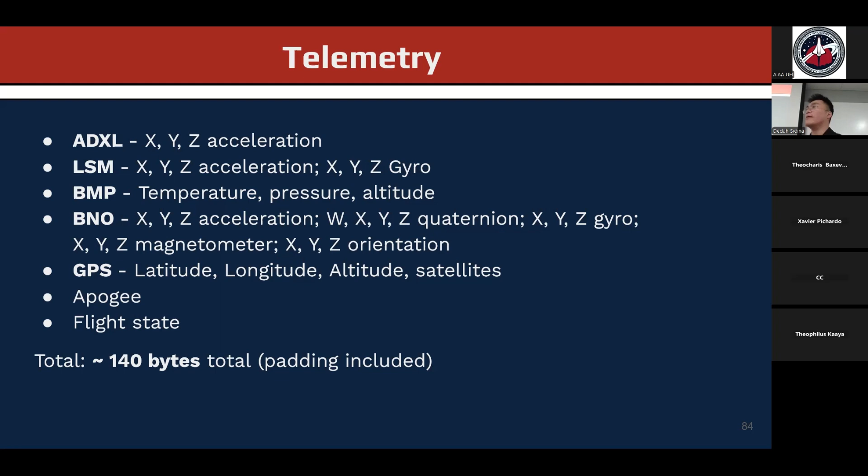These are some of the telemetries that we are planning to send. The most vital ones are the BMP, which sends the altitude, the pressure, and the temperature of the rocket. We also care about the ADXLs and the LSMs, which send us the XYZ accelerations, and the BNO, which gives us the XYZ gyroscope data, along with the GPS latitude, longitude, altitude, the apogee of the rocket, and the flight state. Overall, the total amount of bytes for this data struct is around 140 bytes, and this is optimized. The previous struct that we used had around 160 bytes. That is 15% more data, and we were able to reduce it to 140 bytes.

These are the upcoming tasks for the SRAD ground station. We're planning to develop a PCB design that connects the Teensy microcontroller and the LoRa together, so we can reduce weight instead of using a breadboard, which is heavy, obviously. For the application's next version, V2, we plan to implement a baud rate and COM port editor, so when the user turns on the application, they can manually edit this information and make sure the application runs correctly on their machine. For V3, we will be finalizing the website and packaging the application to run on multiple operating systems like Linux, Windows, macOS, you name it.

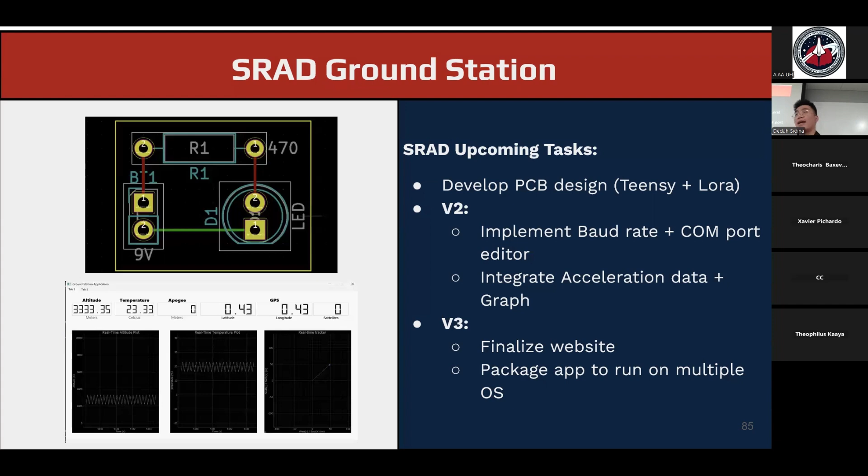I'll leave this testing to Jake. So, to kind of get into what we have done in testing, the COTS flight computer has been, at least the telemetry has been tested. The graph is right here. This was from my personal L2 launch a couple months back, and everything seemed, I compared it to other people's graphs online, and everything seems very normal and perfectly fine.

The Easy Mini has not been tested, but there are plans to test it. The reason it hasn't been tested was that every launch that we finally planned to test it at got canceled, so nothing we could really do about that. But it is planned to at least launch before test launch in March.

But I have pressure chamber tested both flight computers. They function perfectly. Basically, since these are barometric flight computers, it will detect the change of pressure to kind of kick on, and it will turn on. We put little Christmas lights, and it would turn on at its supposed apogee and its main deployment to simulate turning on the charges. But again, everything went fine.

To go more into the telemetry, I would say the accuracy of the GPS was probably within maybe 5 to 10 feet from where it actually landed, so that is very promising. The other thing I've done is battery drain testing on at least the telemetry. From 4.2 volts to 3.7 volts, we are getting about 31.3 hours of runtime. The battery might even be able to go lower than that, to upwards of like 75 hours. At most, the rocket will be on the pad for like 4 hours, and by the time it lands, we already know where the rocket is at, so it will be fine.

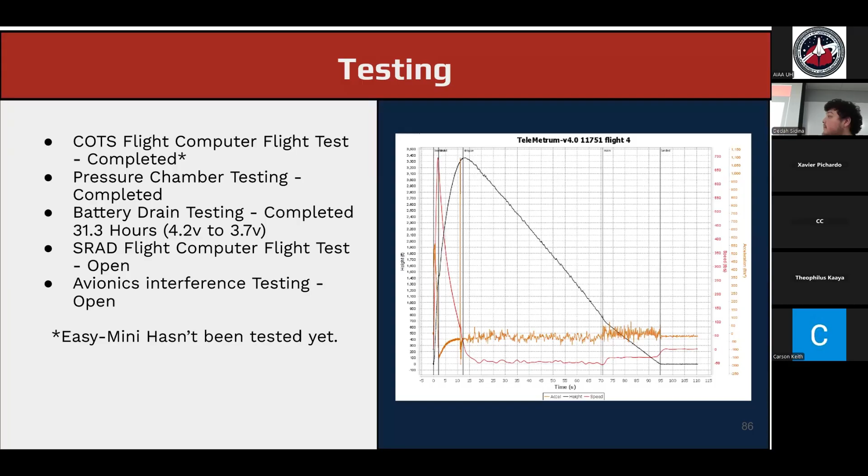SRAD flight computer flight test is still open. That's just because we're planning on doing that during the flight test as a team. And avionics interference testing is once the AV bay and everything's put together, then we can finally start moving, offsetting wires, making sure where everything sits to make sure they're not going to interfere with each other, and we can get good data from every single computer. And then we're going to recovery.

Good evening, everyone. My name's John. I'm the recovery sub-team lead. So everybody else gets the rocket up to altitude. Recovery gets it back down. As you can see, takeoffs are optional, but landings are mandatory.

Since PDR, our focus has been on testing and manufacturing. So we have successfully completed our parachute drop testing. We've then taken the data from that and calculated our descent rates and inflation times for the chutes that we plan to use. We've also finalized our design for the recovery bulkhead in conjunction with structures and avionics. We've also trained ourselves on parachute folding techniques and the attachment methods, different knot tying and how to actually Z-fold the parachutes and pack them into the protective bags.

We've also calculated our black powder charge sizes for the ejection charges we'll be using to separate the rocket and deploy the parachutes, using both lower and upper bounds for the shear strength of our shear pins that will be holding those bays together.

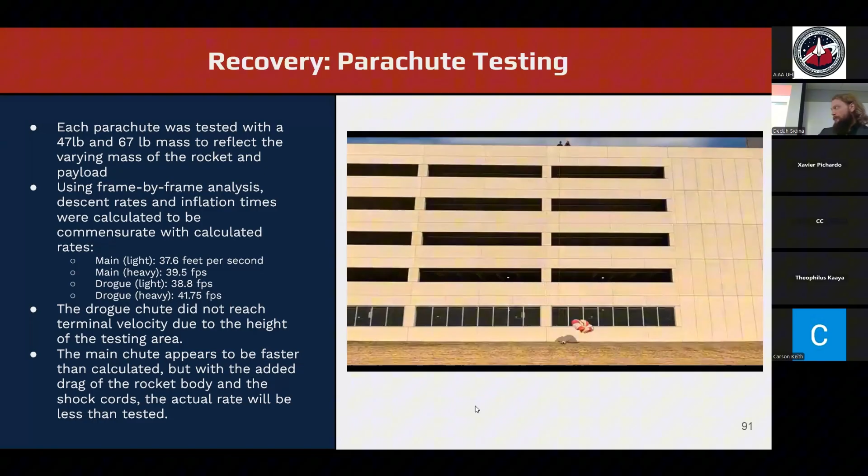This is our 47-pound drogue test, then the 67-pound drogue test. Then we have the main with 47 pounds, and then the main with 67 pounds. And then this is another main with 67 pounds. And then this is a 12-foot chute that we decided to test that our mentor Doug very helpfully provided, but there was not enough fall time for that chute to fully inflate.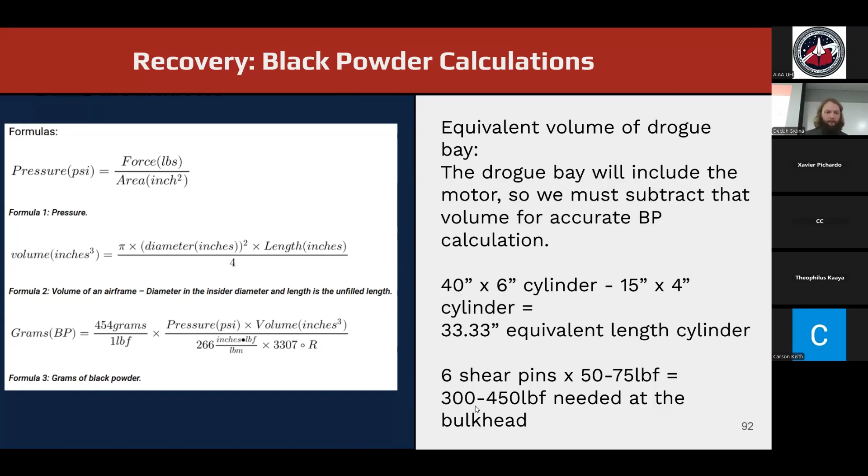That brings us to those calculated masses, the 2.2, 3.23. The drogue primary will be 5.23 and the drogue secondary will be 7.6 grams, yielding the same force per pin distributed between each bay.

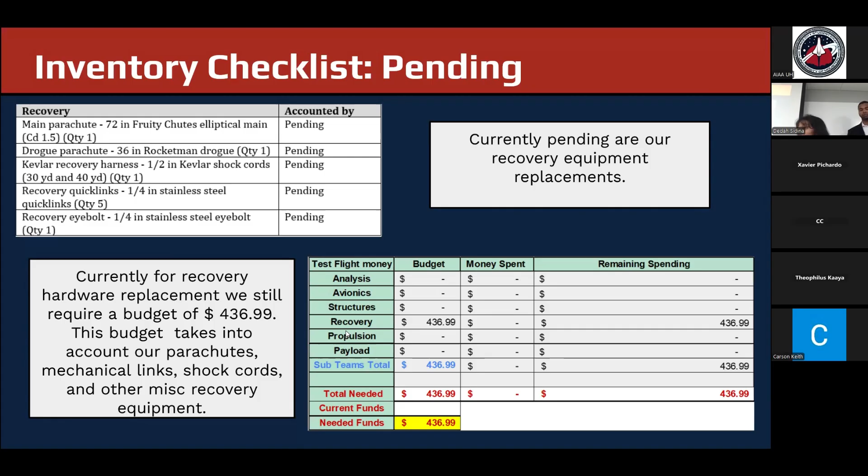What's currently pending is our recovery equipment replacements. For our recovery hardware replacement, our needed budget is $436.99. This budget accounts for all of recovery, including the parachutes, the mechanical linkages, the shock cords or Kevlar, as well as other miscellaneous recovery items. So yeah.

So moving on to our final point, thank you guys for being here. We just wanted to take some time to have a few specific thank yous. We wanted to thank our two mentors, Doug for being here, as well as Randy, who's online. We really want to thank Randy for his contribution to our motor, buying our motor as well as intended motor hardware this project cycle. And we really wanted to thank Doug for his support through both fabrication equipment as well as his commitment to the Case Black timeline.

These two are the whole reason we as a project team this cycle are so ambitious as well as so confident with our testing and manufacturing plans, and their guidance has been utterly invaluable throughout this entire design process. And then moving on, we wanted to give a few more specific thank yous. We wanted to thank Alfredo Hernandez, the previous chief engineer. We wanted to also thank Isabella Deacon, the previous project manager. Without your guys' support, both for logistical issues as well as therapy, we would not be half as successful as

we are right now. We also want to say a few thank yous to some faculty as well as alumni that have provided support through our project cycle. I want to thank Dr. Hamami, Gustavo Santana, Haley Stafford, Brandon Broadway, Robbie Desai, Alex Blick, Eric Lopez, Christian Rossi, Kelly Graham, Jalissa Martinez, Christian Berend, and Emily Humble. And not just these alumni, but all the alumni and STLs that have contributed to this project, as well as our members that have been so active this cycle onwards.

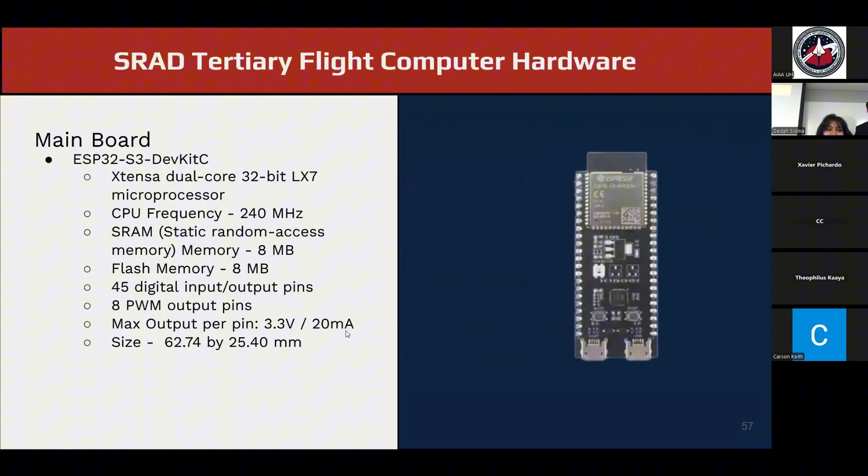So moving on to questions, if I can get all the STLs up here, we can start on the question session. And like I mentioned, if you guys aren't able to answer your questions or if you'd like to provide answers later on, we'll be going back to the first slide, and that is the QR code you guys will have to scan to submit your questions. So yeah, thank you. Are you only taking questions through the QR code? No, this is mainly for people who want to submit their questions just in case they have to leave, or if we have to end at some point and you guys still have questions, you can scan this and submit your questions. We'll be having around a 30 to 40-minute question session right now. So yeah.

Yes. So I guess I'll start with where y'all ended, the worst case scenario timelines. So could you reference back how much time are you giving yourselves to recover from the worst case scenario? So the case black, are you also including shipping as well as manufacturing times for specific things? Like I know the fins are gonna have a lot of layup times, things like those. What is your worst case scenario?

Worst case scenario, we are still taking into account delivery times. Substantial items that have a large delivery time we already have in stock, such as the airframes, the structural components as well. The only thing we are worried about is recovery equipment, but that is something we intend to purchase a significant amount of time before we do our test launch to account for the delivery time. So yeah. Do y'all have the date of, if the rocket is not ready by this date, we are not competing? If the rocket is not ready for IREC? Okay. Ideally, we have the plan of 3 weeks beforehand as a go, no go for our IREC competition so far.

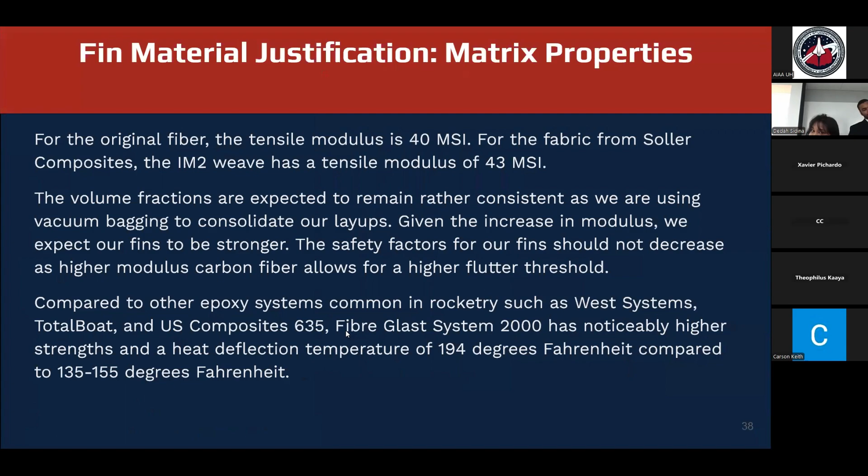Emily. So if you fall into case black and you have a total loss of vehicle, would you rebuild the rocket the exact same way? We would try to. We tried accounting for that in the inventory as well as through our rigorous documentation process this time around in case of the case black occurring. We would want an exact replication of Juno through both our airframes, our parachutes, and our process of manufacturing.

So what if case black was caused by a failure of, let's say, the structure or the way you've got your avionics wired? You don't really have time built in to get to the bottom of the cause, so like a redesign.

So if that were to be the primary cause of the failure, in a way you're saying we're going to do the same thing, so the expected result would be failure again, right? Okay. Accounting for that, we'd want to take some time to be able to deliberate. We have, if I'm not wrong, some time for deliberation for the test flight itself.

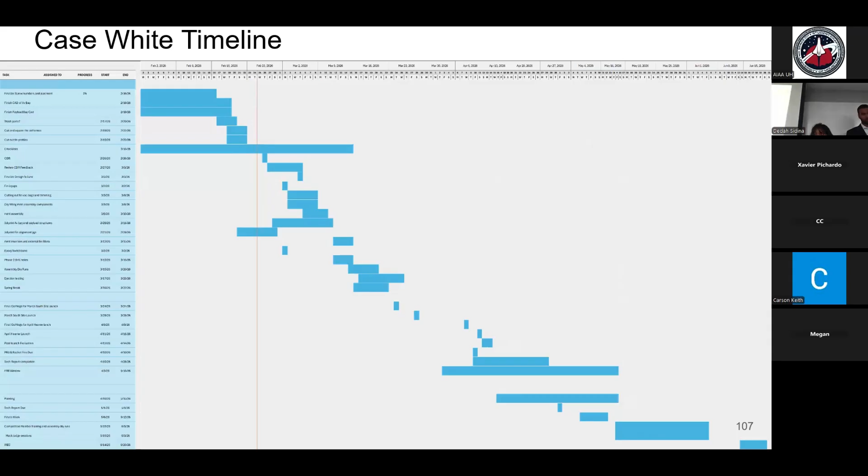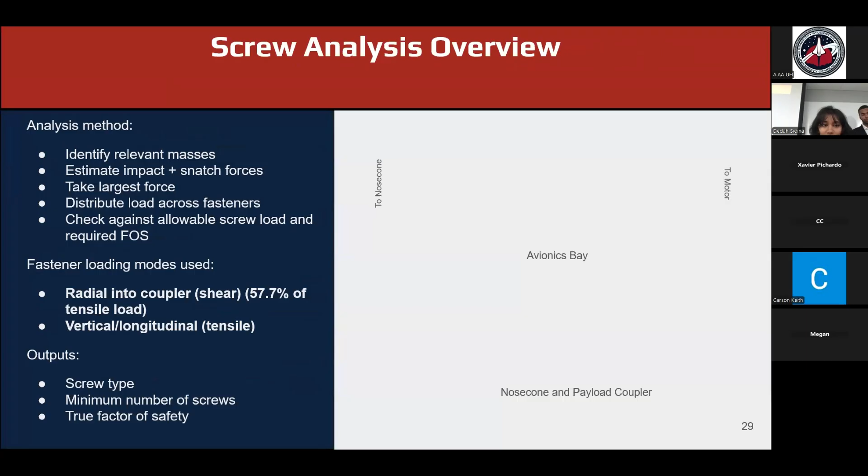What's the maximum amount of members you want to take? I missed the number. Ideally, we would want 4 rooms and we would be able to take more members. But right now, within the budget, being able to collect a little over $500, we'd be able to take 8 people for 3 rooms. And then I think I showed up too late for your budget slides. Yes.

I have my last question. For the whole team, I think John mentioned your leading theory of why last year's rocket failed was a black powder issue. Does the team agree that is what caused the failure last year?

There's a couple of theories. The leading one is a failure to eject, which could be caused by a couple of things. There was the Raptor, the CO2 assembly, potentially not filling with gas quickly enough. There was also the wiring harness, which we theorized may have vibrated apart, leading to the black powder charge either not going off or potentially being too small to eject the.

There was another theory that the shear pins may have lengthened due to spending so long in the container and warming up. They may have stretched rather than sheared, which would have required a larger charge to actually separate. Obviously, without fully recovering the rocket, as half of it is still in the desert, we can't verify exactly which one of those that it was.

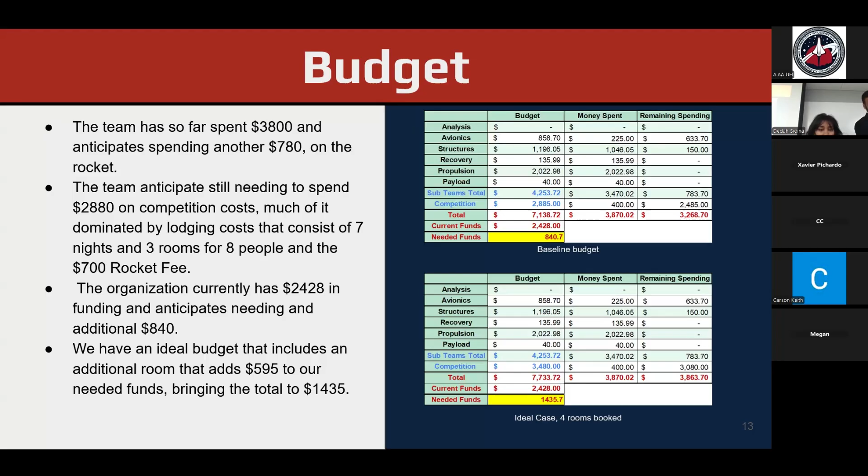I actually noticed, when I was looking at the old photo of the recovery test at Hamfest, you could even see gas coming out of the vent holes, or not the vent holes, but the screw holes. It's just something we never noticed, because we just didn't know better at the time.

And so that's an entirely new failure mode. That is, everything worked, but you failed to contain your pressure to the proper chamber, and therefore your recovery did not deploy properly. That's something that we've also accounted for in this year's design. The wires from the avionics bay to the wiring harness will be permanently mounted and sealed, like you were saying, to prevent any gas leakage into the avionics bay.

We plan on using probably a stronger connector, but me and Dita have used JST connectors to connect the bulkhead to the main avionics wiring. We'll experiment with different connector methods to create a stronger bond. But I mean, it's just making sure that bay is sealed and will not get any pressure inside.

Yeah, and I don't know how much. I mean, that's all good. I want to make sure you guys are taking extra caution with that, you're focusing on that, because I think my main takeaway from this design is it's good but generic, and I don't see an iteration. Knowing last year was a complete loss of vehicle, I would have expected more of: we think it failed this way, therefore we made these changes this year, in this presentation.